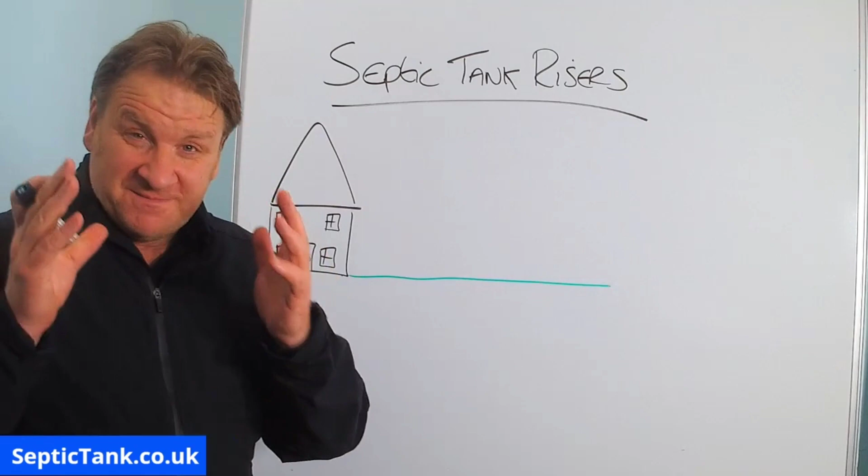So what are septic tank risers? How do they work, and why would you need them? Well, let me explain. Right, so to start with, here is a septic tank riser.

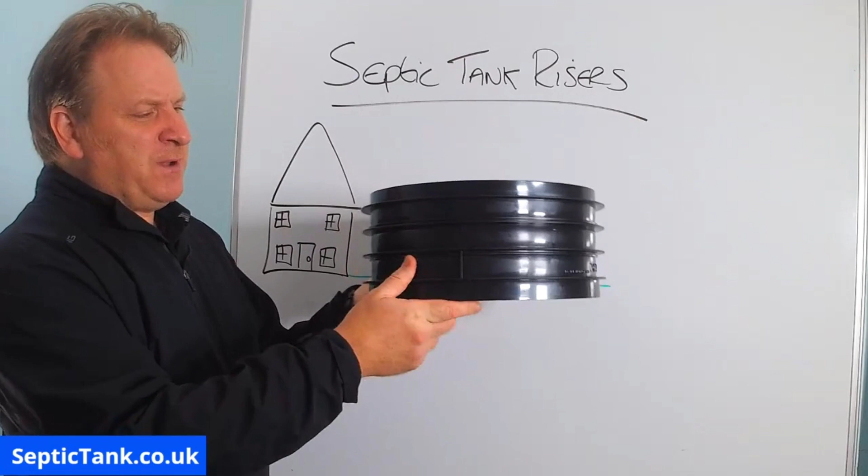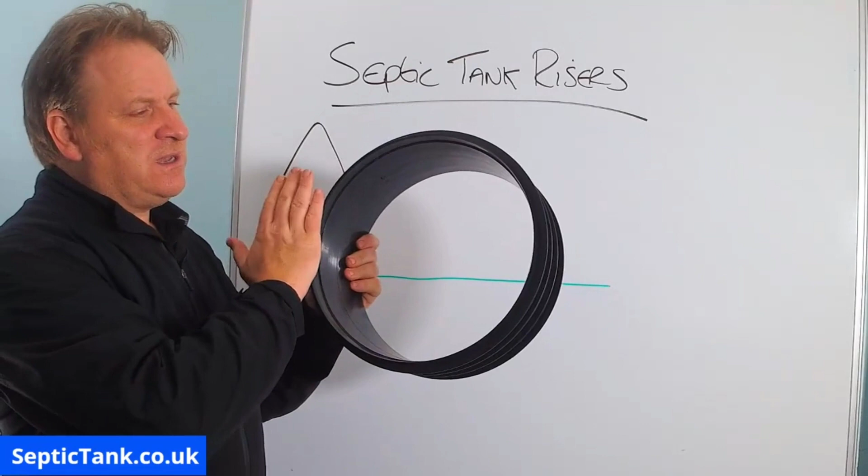Septic tank risers can come in different shapes and sizes, but this is a typical shape. Typically they range anywhere from 150 mil all the way up to 1,000 mil in height. Diameter wise, they can range anywhere from 360 to 460 to 600 mil.

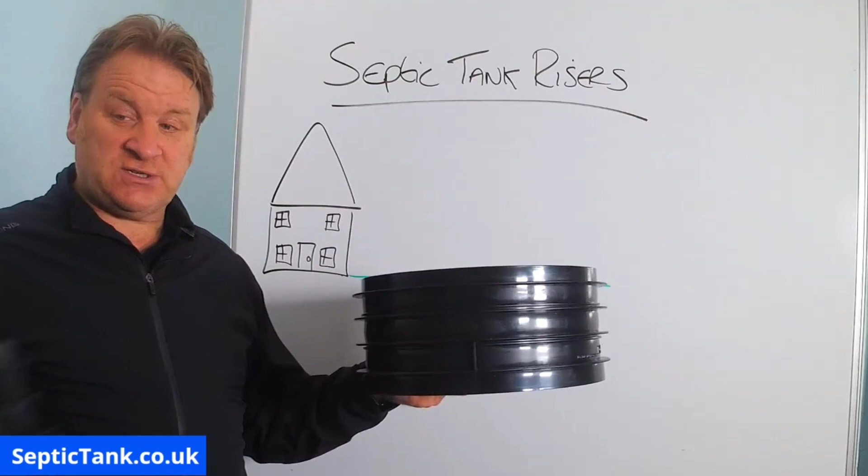Basically they all come in sections. So you get one section, you can put another section on top of that, and then the lid goes on top or into the top of the riser. So they're called risers because they form like a chimney stack. And typically, most risers will go up safely to about 1,000 mil.

Okay, so I've shown you what risers are, but why would you need them, and how do they work? Well, let me show you the principle here.

Okay, so this is your house, believe it or not. I'm not the best artist in the world, but that's a house, right? And let's say this is a normal house with a normal waste pipe coming from it. So the normal waste pipe would come from the house, it would go to there. And then everything can be worked out from the levels of the waste pipe that comes from your house.

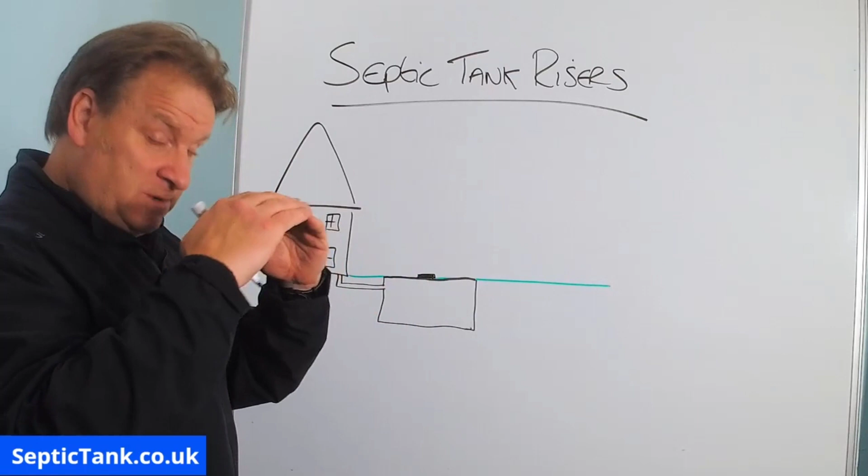Now, if the waste pipe is relatively close to the grass, then your septic tank - let's just imagine that is the septic tank for a minute - the top of the septic tank can be basically flush with the grass or just below it, and then your lid would go on top of that, and the lid would either rise up slightly from the grass or be flush with the grass. So that's an ideal situation, but unfortunately not all situations are ideal.

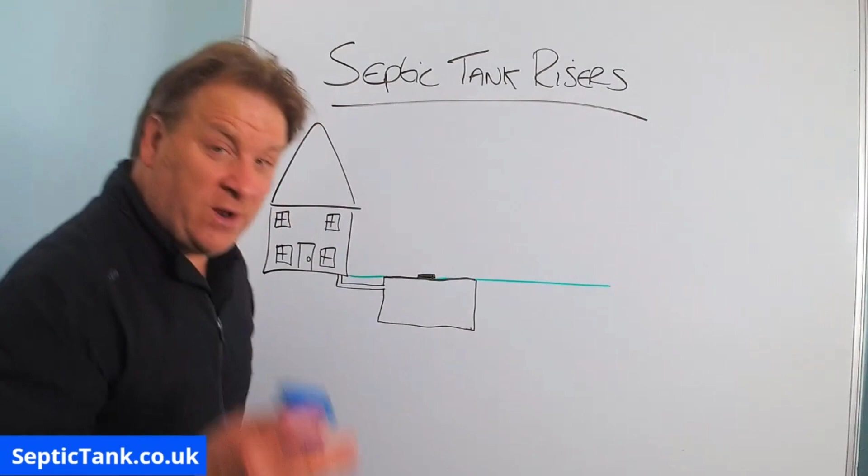All right, so let me give you a scenario now in which you'd need septic tank risers. So let's start again, wipe that out, and let's say this is your grass baseline here. Okay, and let's say the waste pipe for some reason coming from the house is quite deep. So let's say the waste pipe starts there, which is the case in some instances.

If it's coming down, you've got a basement or a cellar, and the waste pipe goes down from there. That's one instance why the waste pipe would be so deep, or maybe the builders have just put the waste pipe really deep. There can be a number of reasons for doing so.

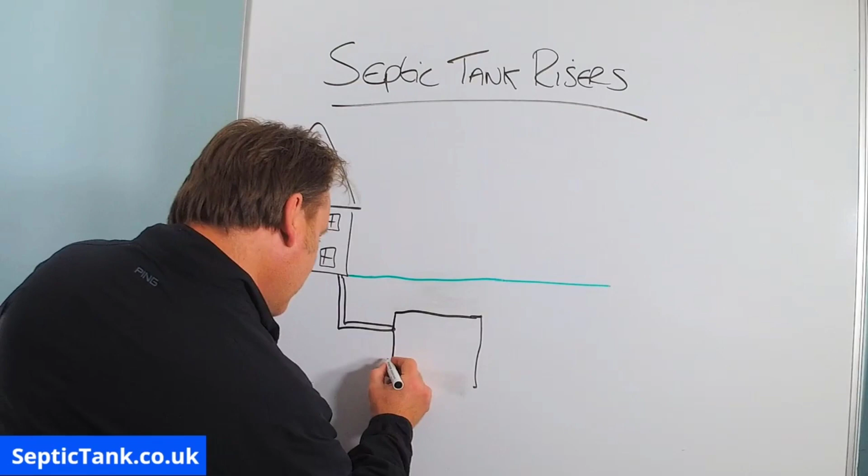Now let's say that the top of the septic tank, which should be flush with the grass, is now... let's just level that off. It's always hard to talk and draw at the same time, but at least you know it's live and not edited, eh? So let's straighten that up a bit more. All right, so that's the septic tank, and that's the top of the septic tank.

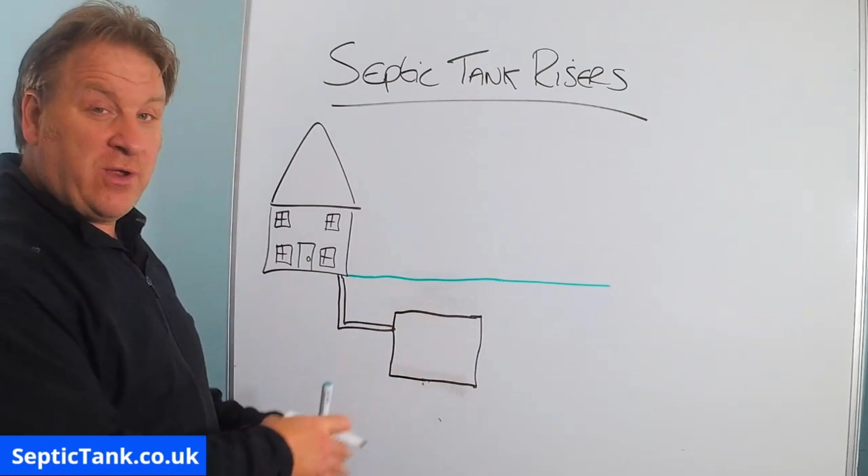So let's say this is a prefabricated septic tank you've bought, right? And they only come at a certain length and height. Now, regardless whether it's a concrete one, a plastic one, or a fiberglass one, when you actually connect it to the inlet pipe of the septic tank and the outlet pipe, you've now got this gap or space between the top of the tank and the grass.

So if you left things as they were, the lid of the septic tank would be here. So if you need to get it inspected or emptied, then you've got to dig a big hole down through the grass, through the soil, to expose the septic tank lid.

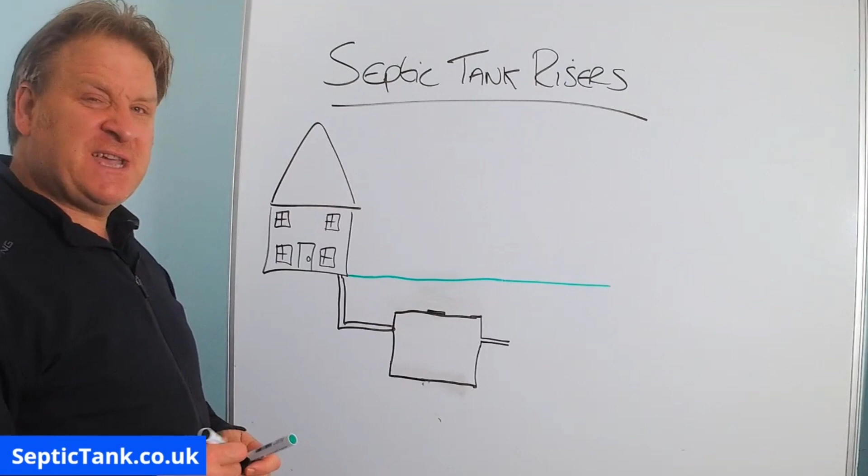So what they came up with is, as I just showed you, septic tank risers, with the lid on top. And so what that does is, once you're installing your tank, you would then put these risers on. And the risers would then bring the septic tank lid to ground level. Isn't that clever, right?

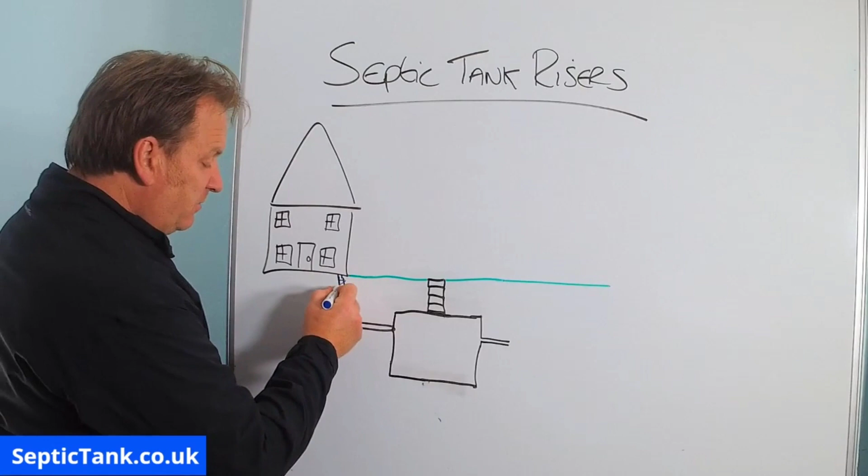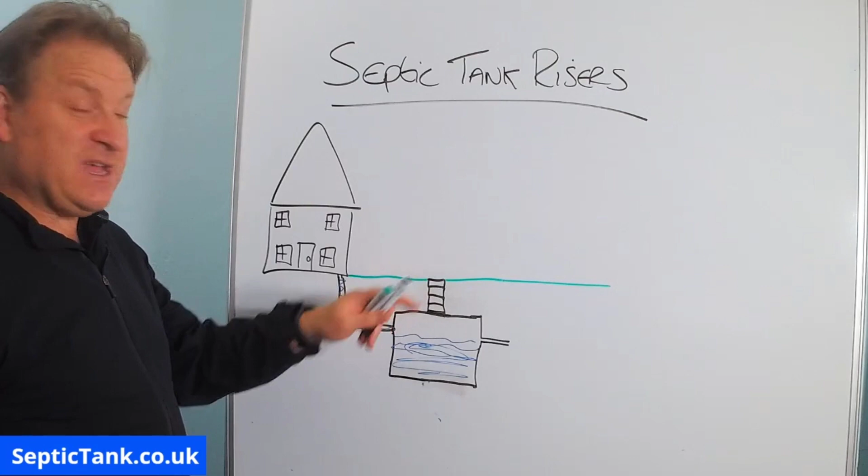So even though your septic tank is quite deep in the ground, it can still function normally. But if you get a problem, the tanker man can just come and locate the lid because it's flush with the grass, and he can lift the lid off it.

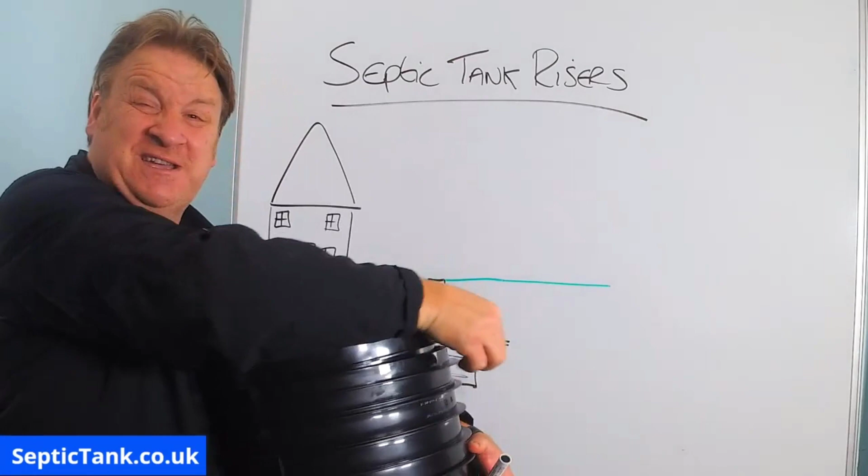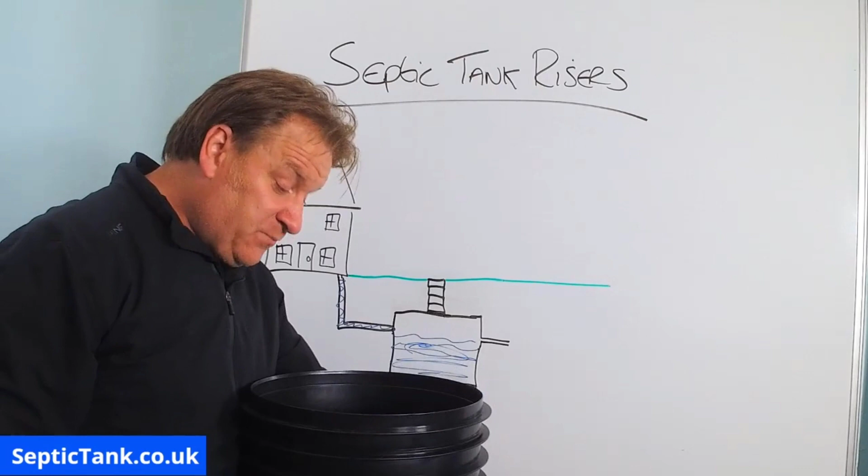So let's say I'm the septic tank man, I've come now, it'd probably be really tight, the septic tank lid. I'm just giving you an in-house demonstration. He can take the lid off, have a look down into the tank, or even put his pipe in there and suck away all the fat, grease, sludge and wastewater, or do a septic tank inspection now without having to dig your garden up.

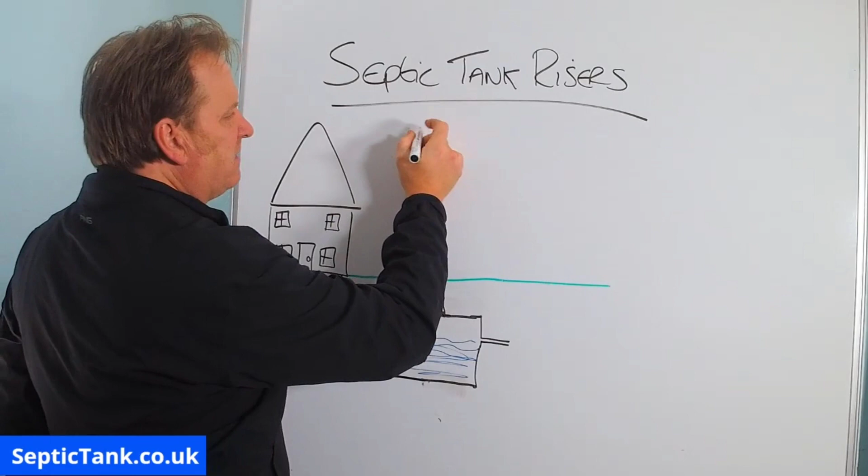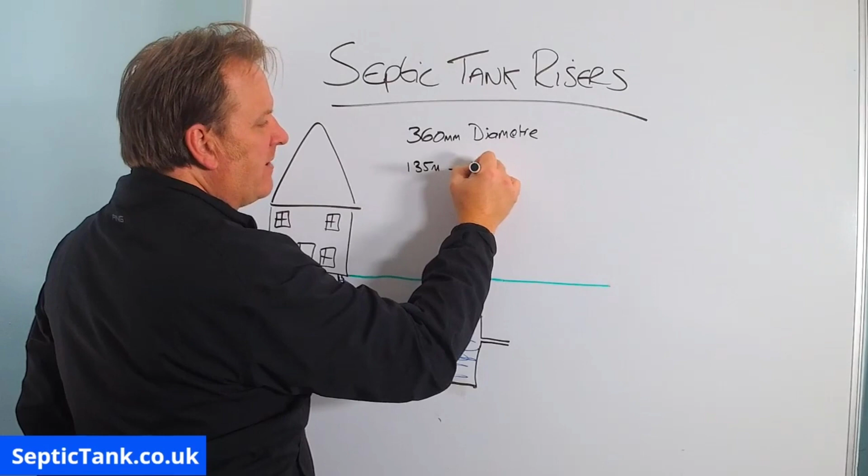And that's why septic tank risers were invented. So how much do septic tank risers cost? Well, typically they are about 360 mil diameter, and they can range anywhere from, say, 135 mil in height to 1,000 millimeters in height, which is a meter.

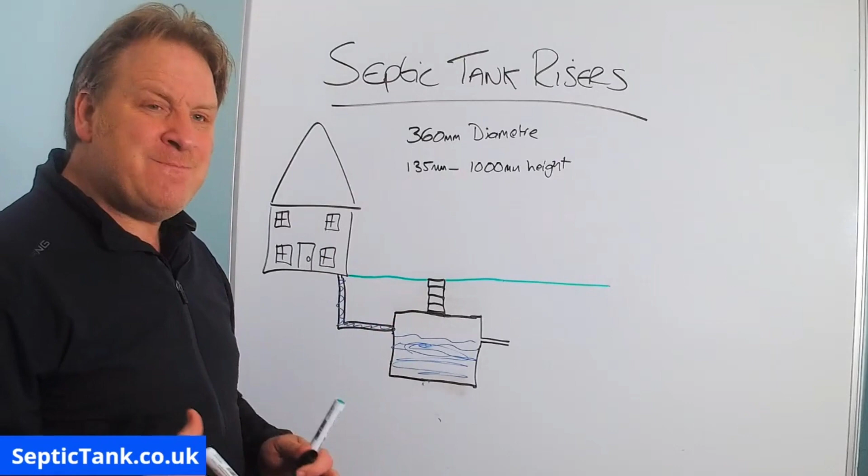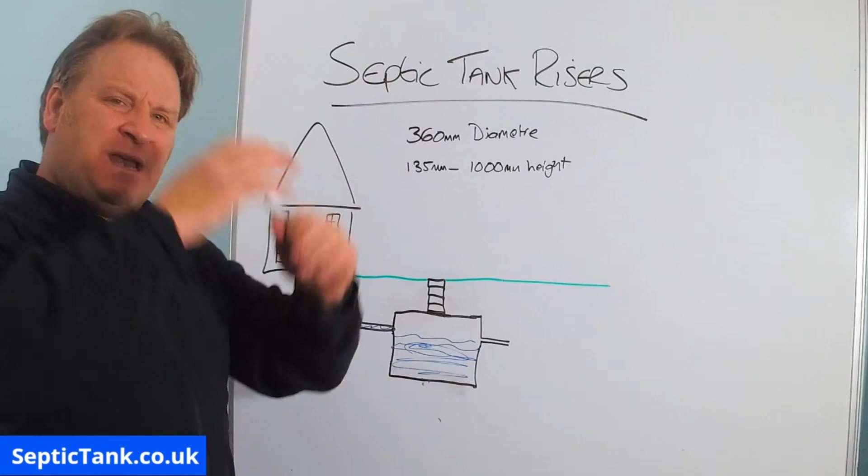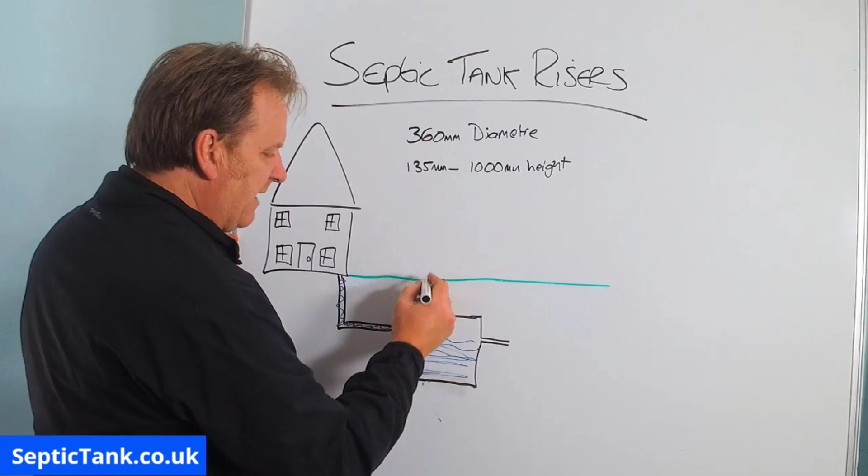You can go higher than 1,000 mil, but it then becomes unsafe, I suppose is the best word, because imagine the taller you build a chimney, the less support it's got. So the higher it goes, the more chance it's got of toppling. And it's the same with risers. Once you build a big stack, imagine this stack went up and up and up and up, right?

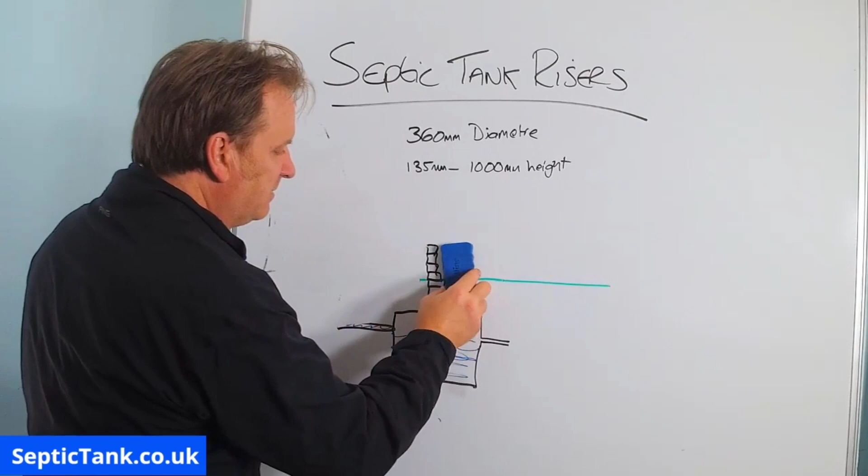Forget the house is there for a minute, pretend your house isn't there. But you've gone down into the ground here, and your grass level now is here. What can happen is, if there's any subsidence in the soil, the actual risers can go off kilter. They can come out of sync, they can be detached.

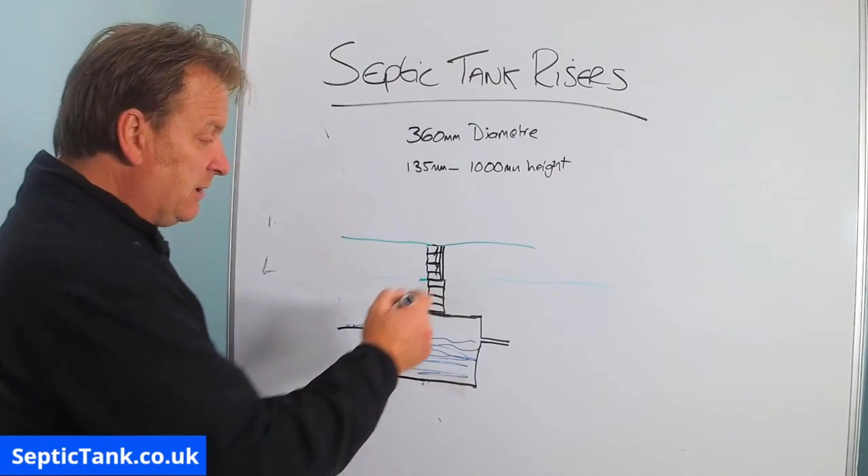In that case, a load of soil would then pour in from the subsidence and fill your tank up with soil, creating a hell of a problem, because to fix it you've then got to excavate a big hole again to get to the tank, get all the soil out, and redo the risers.

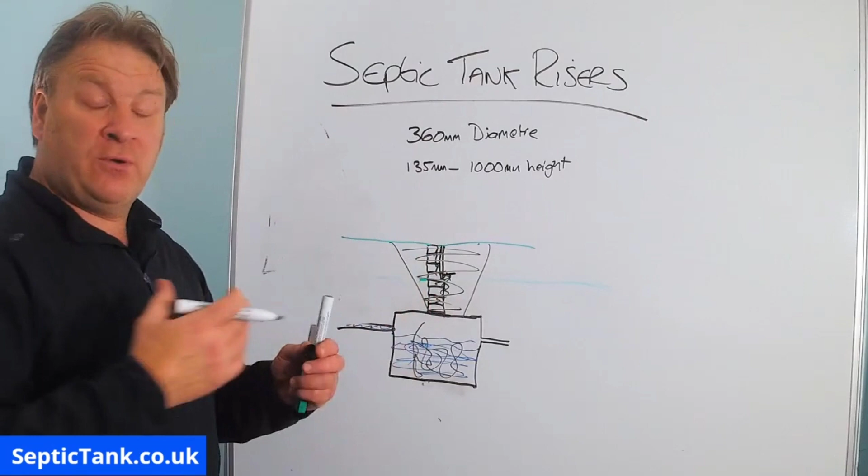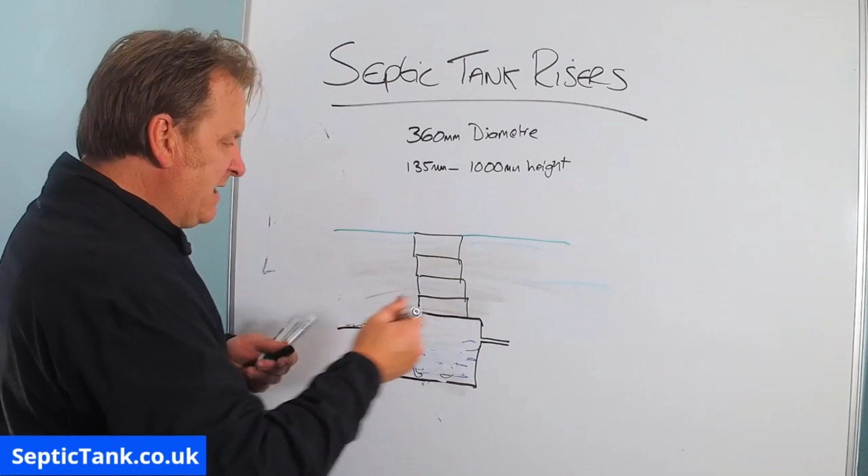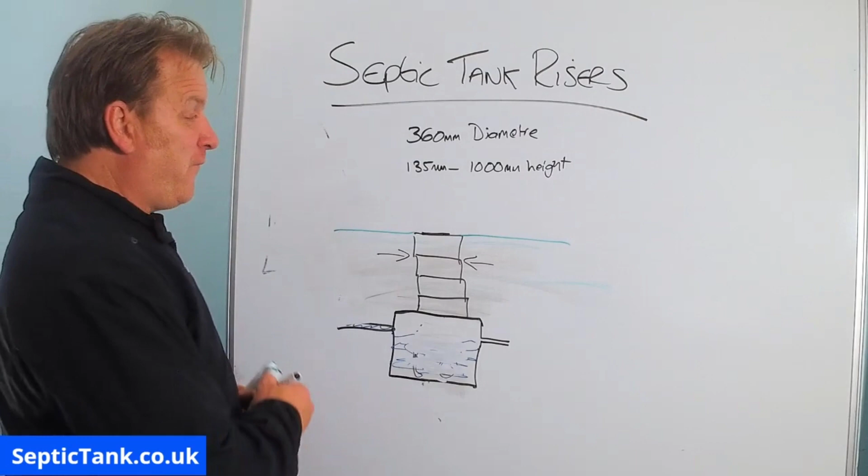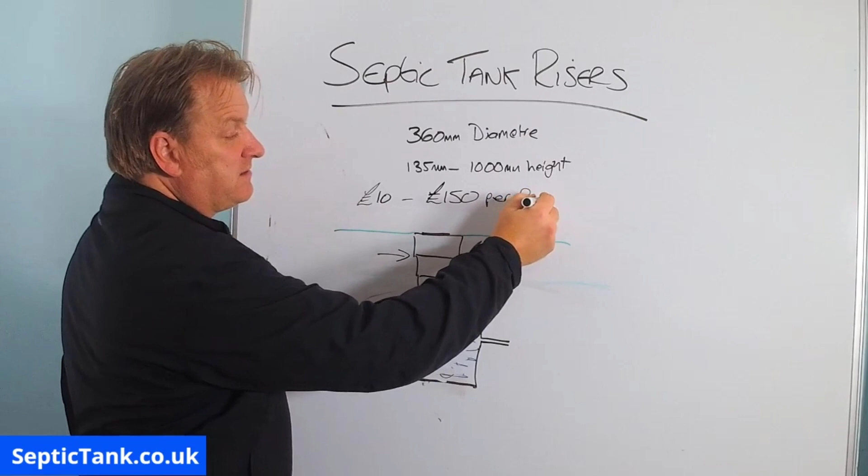I hope that video has helped you. That's what septic tank risers are, that's how they work, that's typically the size of them, and they can range in price anywhere from £10 a riser to, I suppose, £150 per riser. And as I said, they come in increments - you can't just get them at 1,000. Typically you can't get them a meter, 2 meters, molded. You've got to get them in sections and then build up to that.